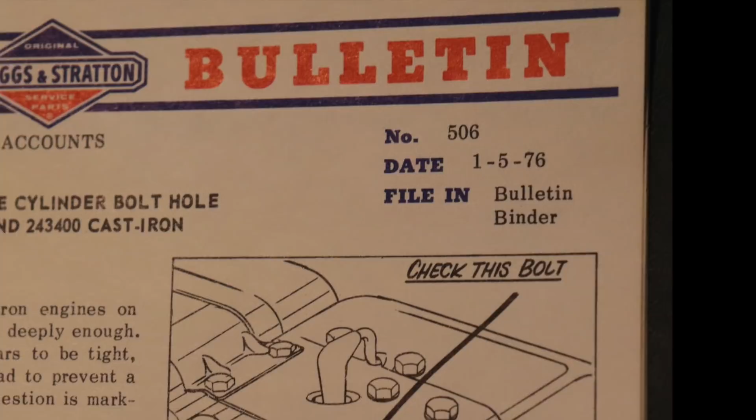This one has to do with insufficient threads, a hole in the cylinder not being drilled and tapped deep enough. That can create a problem. Let's read deeper into this classic.

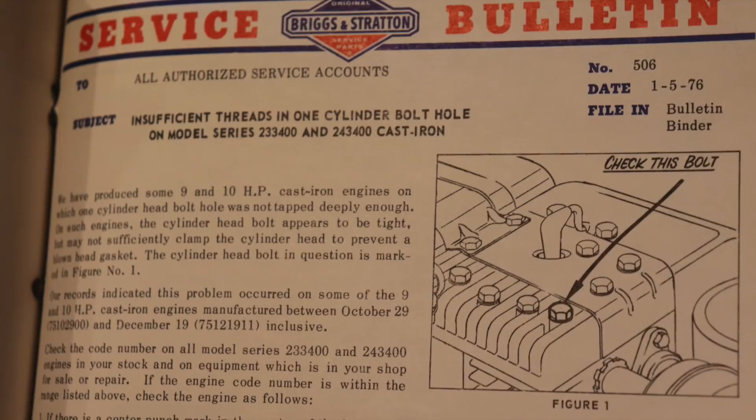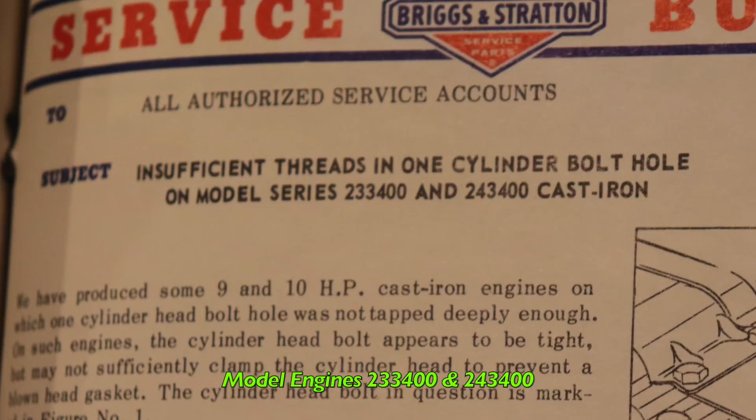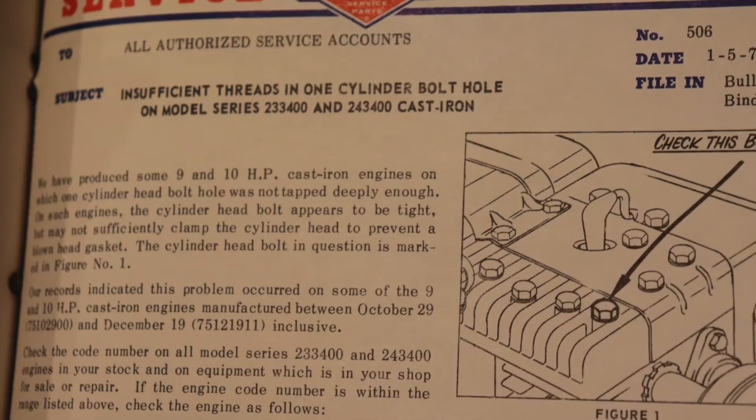Subject: insufficient threads in one cylinder bolt hole on model series 233400 and 243400 cast iron engines. These are the engines on those old lawn tractors that you all love and adore. We have produced some 9 and 10 horsepower cast iron engines on which one cylinder head bolt hole was not tapped deeply enough. Sounds like a quality control issue here.

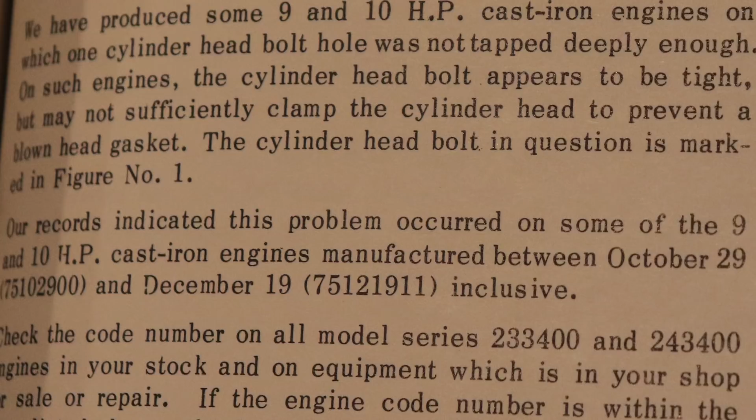On such engines, the cylinder head bolt appears to be tight, but may not sufficiently clamp the cylinder head to prevent a blown head gasket. That could be catastrophic. The cylinder head bolt in question is marked in figure number 1.

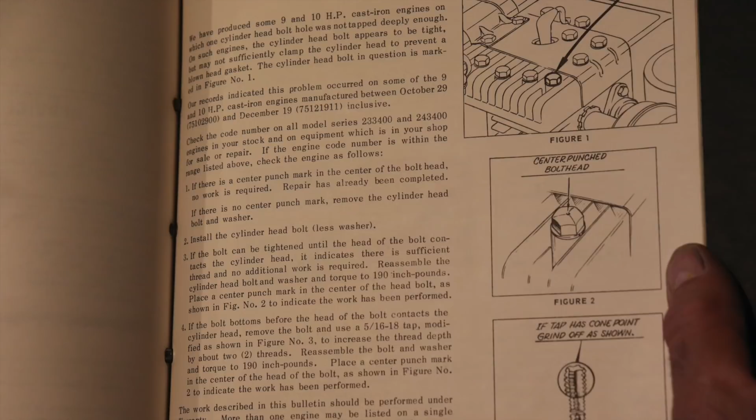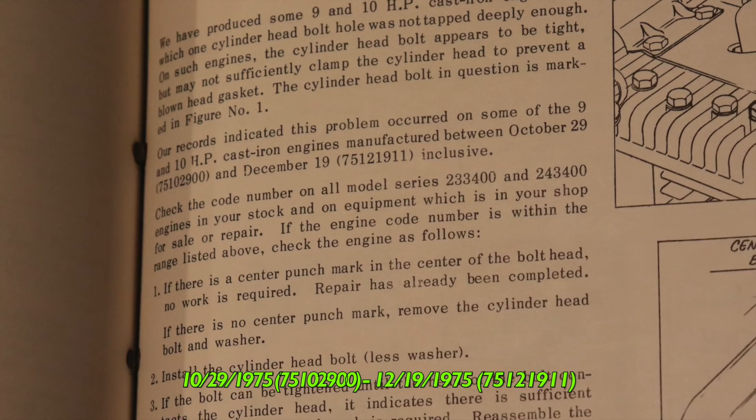Our records indicate this problem occurred on some of the 9 and 10 horsepower cast iron engines manufactured between October 29th, 1975 code date and December 19th, 1975 code date. So these are code dated 1975 engines.

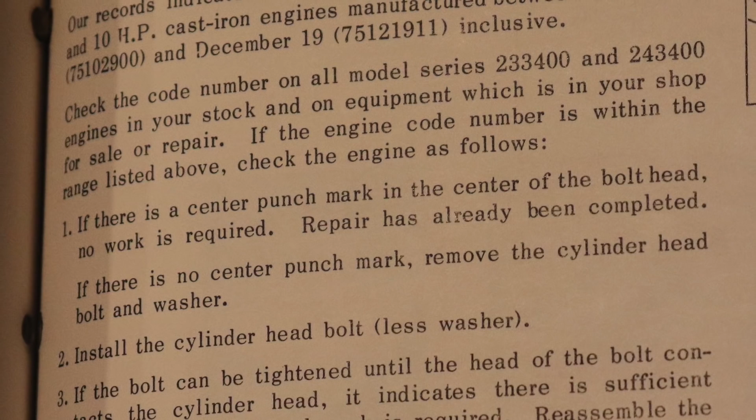A select few had slipped through the cracks. Check the code number on all model series 233400 and 243400. Maybe you have one of these engines on your classic riding mower, engines in your stock, and on equipment which is in your shop for sale or repair. If the engine code number is within the range listed above, check the engine as follows.

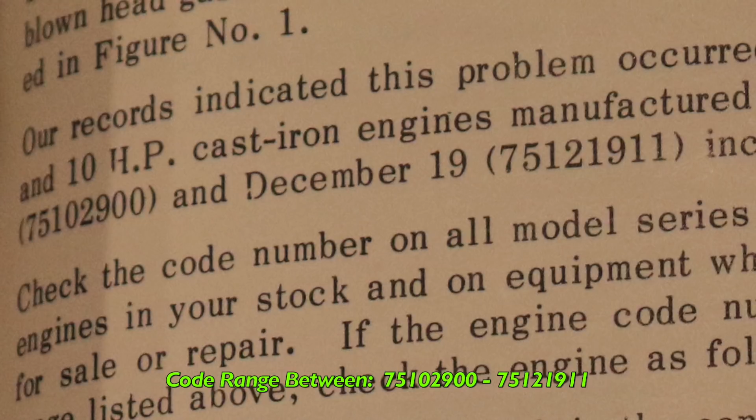Here's where our testing comes in. If there is a center punch mark in the center of the bolt head, no work is required. Repair has already been completed. So there's your telltale sign, a center punch mark in the center of one of the bolt heads.

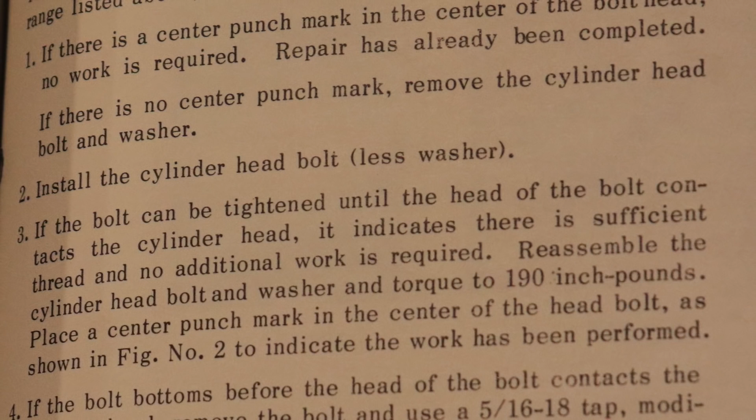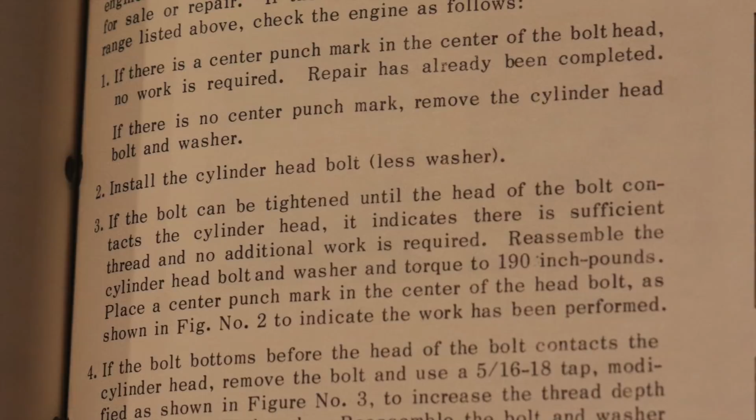If there is no center punch mark, remove the cylinder head bolt and washer. Install the cylinder head bolt, less the washer. If the bolt can be tightened until the head of the bolt contacts the cylinder head, it indicates there is sufficient thread and no additional work is required. Reassemble the cylinder head bolt and washer and torque to 190 inch-pounds.

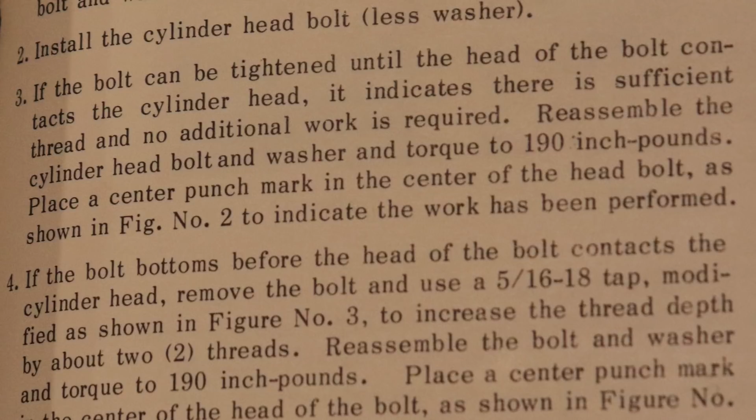Place a center punch mark in the center of the head of the bolt, as shown in figure number 2, to indicate the work has been performed. If the bolt bottoms before the head of the bolt contacts the cylinder head, remove the bolt and use a

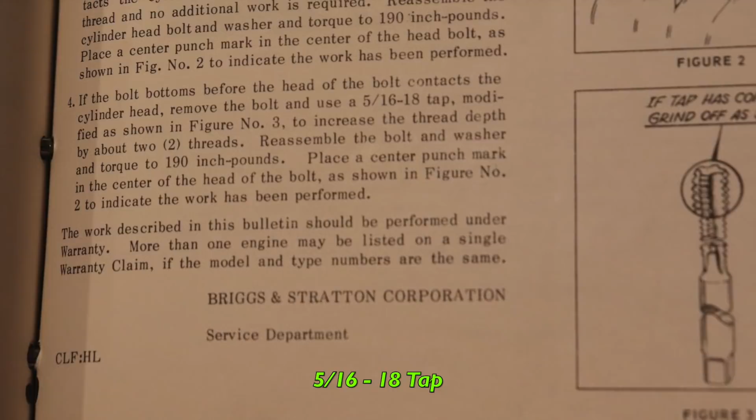5/16-18 tap, modified as shown in figure number 3. So you're going to need to modify a tap, or use a bottoming tap to increase the thread depth by about 2 threads. Reassemble the bolt and washer and torque to 190 inch-pounds.

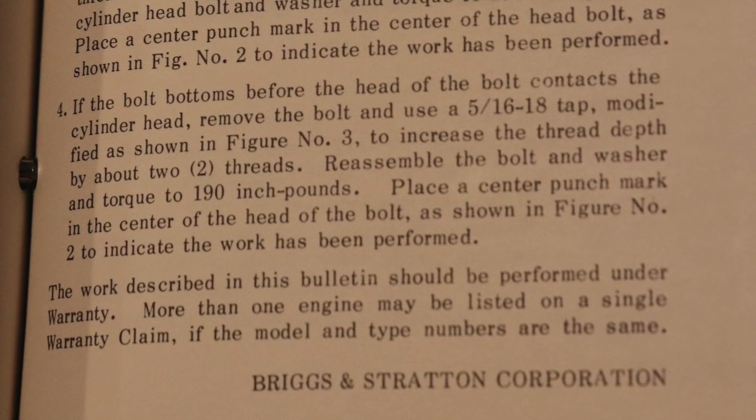Place a center punch mark in the center of the head of the bolt, as shown in figure number 2, to indicate the work has been performed.

This is almost like when you have a female cat spayed. They tattoo the cat so that people know that the cat had been spayed. This is very similar, but we're using a center punch mark.

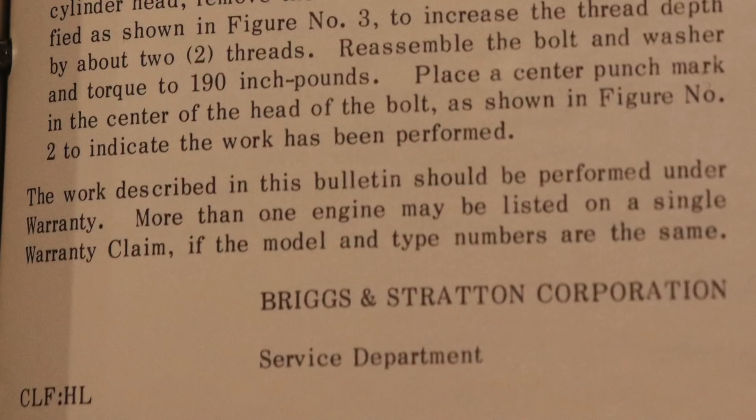The work described in this bulletin should be performed under warranty, so you'll get paid for this one. More than one engine may be listed on a single warranty claim if the model and type numbers are the same, so they must be the same. Sincerely, Briggs and Stratton Corporation, Service Department.

So, what have we learned today? We learned that a select amount of engines back in 1975, between October 29th through December 19th, had slipped through the cracks, whereas a cylinder hole was not properly tapped to the correct depth. And now it's up to us, the servicing dealer, to tap that hole deeper and then mark the bolt with a center punch mark to let everybody know that this repair had been done.

So for those of you out there with your classic tractors, if you have one that falls in that range, run out to your shed or garage right now and check to see if that center punch mark is there. If not, you'll need to tap it deeper. So, there's another Service Bulletin Classic.